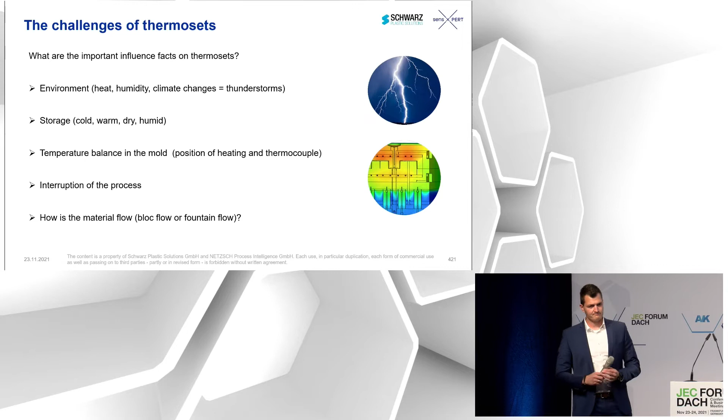Now, as the headline says, thermosets are having some challenges. And as I mentioned earlier on, it is not just the physical transformation of the material, it is the overlapping chemical situation. And thermosets as such have a specific behavior. You might compare it to nylons, for instance, on the thermoplastic side. They are fairly nervous, I would call it like that, in regards to environmental influence.

So sudden changes within your production area, like rise of humidity in case of a thunderstorm or something like that, or undefined storage conditions, today hot, tomorrow cold, and so on, have a large influence on the behavior of the material and on the processability.

Besides that, you get some typical natural things like an interruption of your process cycle. And think about the behavior of a chemical material. I would call it, it's sometimes like a wave. And if you interrupt the wave, it starts at a different height again, and you will read it in your product quality, and automatically you will have additional problems. And therefore, that leads into differences of the flow behavior, for instance. So your cavity, your body of the part will fill in a different way.

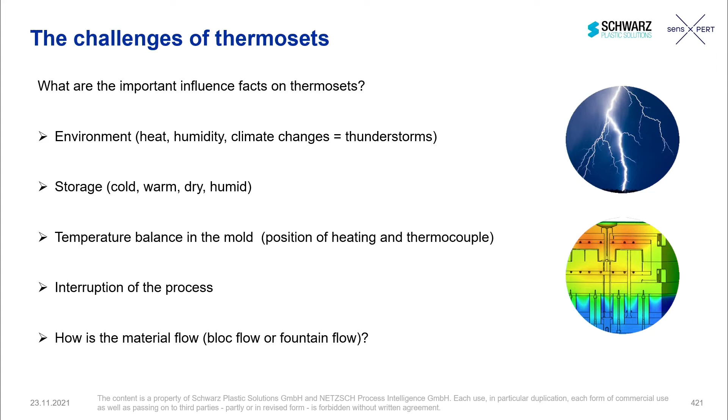Yeah, and to show you a first introduction into what can happen during a production, here we show you an example of one and the same resin system. It's a SGL E420 SnapCure epoxy resin that has been cured within different states. So one time we've cured the pure resin. On the other hand, we have cured the same resin without additional additives in a glass fiber and carbon fiber prepreg. And what you can see here is that with one and the same resin, you have 3 different behaviors of curing. So you can see that the fibers have an effect on the cure process itself.

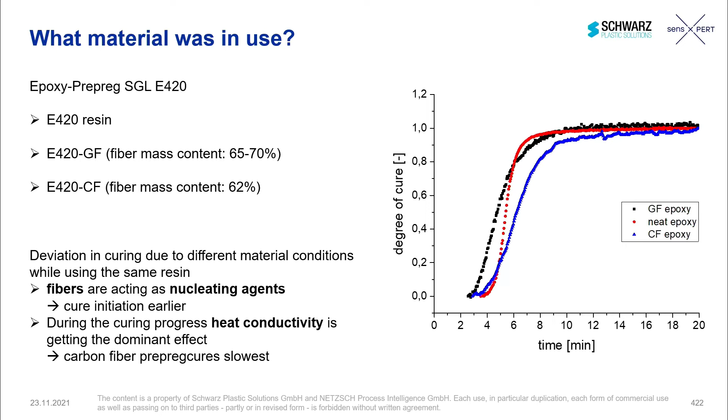So what we do mostly today is that we characterize a pure resin within the laboratory environment, and then we transform all the information into the production environment without taking into account that we have different fillers inside. And therefore, as Ingo has already said, this is one of the main reasons why today's simulations of polymer processing fail. And this is just the first introduction into how different material behaviors can be due to different fillers within a resin, but we will show you more examples later on that we created during our last session a few weeks ago, during reactive injection molding.

Yeah, in fact, as you see, both of us did trials based on epoxy resin. This is a resin where very much experience is already there in the market and where you can interpret the signals easier than if you have materials where some add-on reactions are happening during the process. This is why we started with it. In that particular case, we were using a granular material from the material maker Raschig in Ludwigshafen called Epoxidur EP 3585. That material will be used, for instance, for encapsulation or for single parts which are molded. And you can use compression molding, transfer molding, and injection molding processes.

It's a material which is pretty stiff compared to thermoplastic materials. It has a filler content of about 70%. And that's the surprising thing compared to thermoplastic materials. The filler content is much higher. Therefore, the resin or the polymer content is fairly low, and still the influence is extremely high on the behavior.

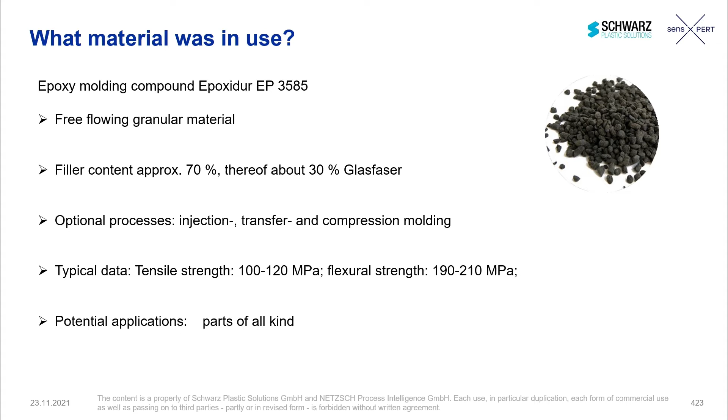The idea behind is making sure that under all production circumstances, the future generation will be able to work with those complex materials. Why is that so? The customer wants to have security. He wants to sleep well when he has placed such a product, and go into automotive or aircraft industry. Nobody wants to have a risk. You want to have something which you can rely on. Your car shall last 8 years or 10 years without a problem, and therefore the manufacturer doesn't want to see the car back in the factory or in the garage.

So therefore, they want to be safe with whatever product is designed on it, and it is an ideal material to replace metal. Therefore, it is a lightweight solution. However, you need to know how it works, and there is the problem. We are getting more and more problems in filling our shop floor with well-educated staff. So we have to see how a 24/7 production, so 24 hours a day, 7 days a week, can be filled with the adequate people.

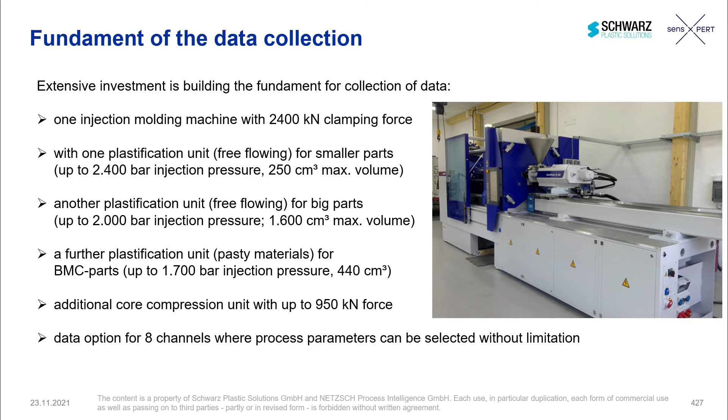And the interesting thing is, here underneath, where all the electronic stuff is installed, there are some open channels, in total 8 of them, which can be freely selected between all the parameters of that machine. And those data come out via cable. We cannot put that into Bluetooth. We still need the cable. They are then driven into a big cloud of Netzsch, where the computer scientists, I would call them, are finding their ways to select the most important data out of a real production cycle. So we are not playing somewhere in the air. We are doing real production conditions like we see with our customers, like we do out of our own experience, send it up, and then under the hood of Alex Chaloupka, it will be selected, condensed, then we verify it together, and then we prepare it for our dear customers.

And that is not enough. In addition to the machine, we also need a mold, as you can see here. And with that mold, we can do the typical scientific specimens for any kind of test bars or plates or so. But we also have some specific other inserts in that mold. All of them are equipped with a variety of sensors, temperature sensors, pressure sensors, and the dielectric sensor, which is the most important one in that case, because we are able, by the technology of Netzsch, to determine whether a process cycle is finished or not.

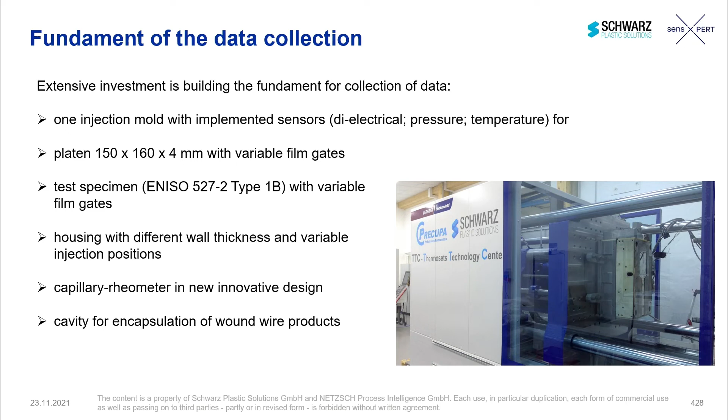Nobody likes that. On thermosetting material, you don't see that. But you will see it on the cost side, because it's much too long in the cycle, and you will also see it in the quality of your material. That is why we have all this reading and intelligent equipment installed, and that gives the stability and the quality into the cloud.

How do we do that? We have connected our package to the machine environment. We have an edge device created by ourselves where a huge software package is running, also equipped with artificial intelligence, where we collect data from sensors in the mold and collect the machine parameters.

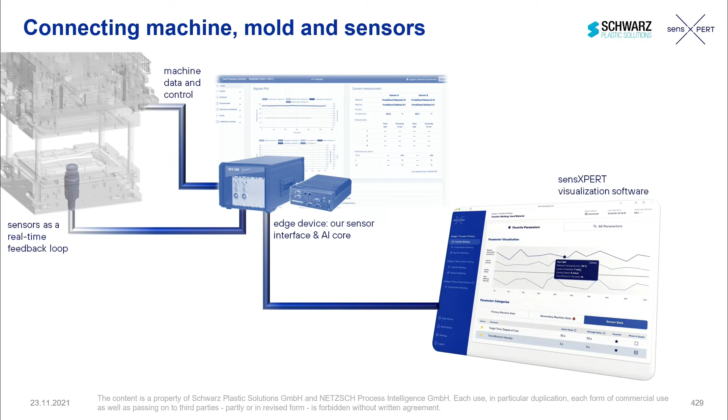At the same time, while collecting the data, our AI algorithms are running and calculating quality criteria of the material, like glass transition temperature and degree of cure. We can also follow different mixing ratios, like baking a cake with different amounts of constituents, and see the difference. Based on the information our AI model has, we can readapt the process to create a good part at the end.

After collecting the data, we transfer it to the cloud environment, which acts as the storage system but also as the global AI platform, because here we have more or less unlimited space and a huge amount of data we can store. It can then be used to readapt the machine learning models and continuously improve the model we're using.

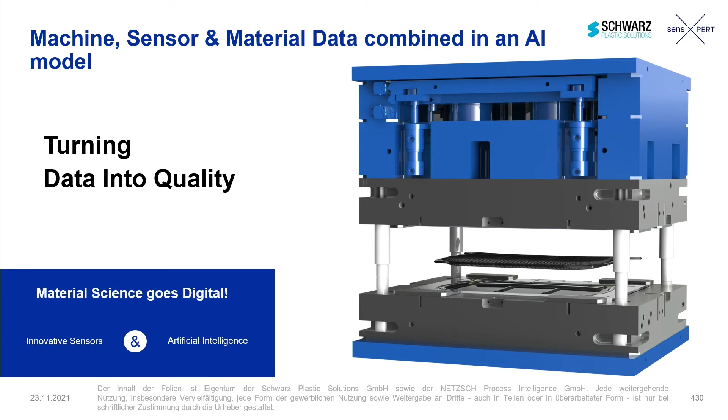What we principally do is collect data from three different sources during the production environment. We use the machine data, the cavity data - sensor data out of the mold, like our dielectric signal, to collect data on material behavior, pressure, or temperature sensors - and we also use material data, here we talk about reaction kinetics, the physics and chemistry behind the behavior of polymers.

Combining all three sources of data, we are able to see the dependencies between process parameters and material behavior, and therefore are able to readapt the process due to different states of the material.

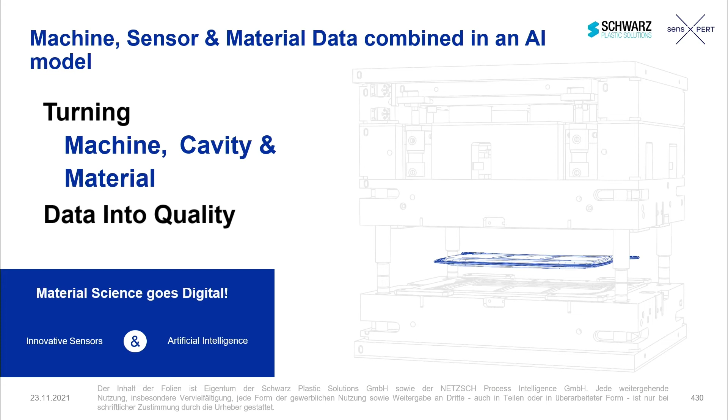When we look at artificial intelligence, what are the prerequisites? There's a high need to create a huge amount of data to be able to have the basis for the statistics AI is using. Therefore, we need a huge amount of data we will never get from a real polymer production plant.

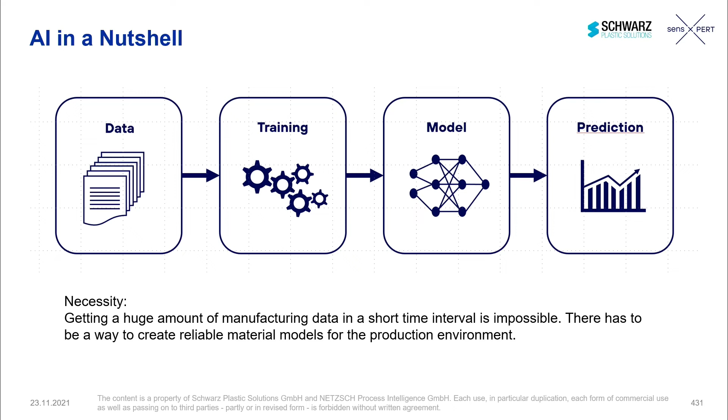There's no chance to install a package and follow the process for 6 months, 12 months, or longer to get enough data to create a machine learning model capable of readapting the process in terms of creating higher part quality or reliable processes.

Therefore, we have our own way of doing artificial intelligence. We simulate our own data sets based on reaction kinetics, real process data from the environment we're installed into, and we combine current quality criteria of our customers, whether it's degree of cure determined with a differential scanning calorimeter from the lab, or the elastic modulus created via dynamic tests.

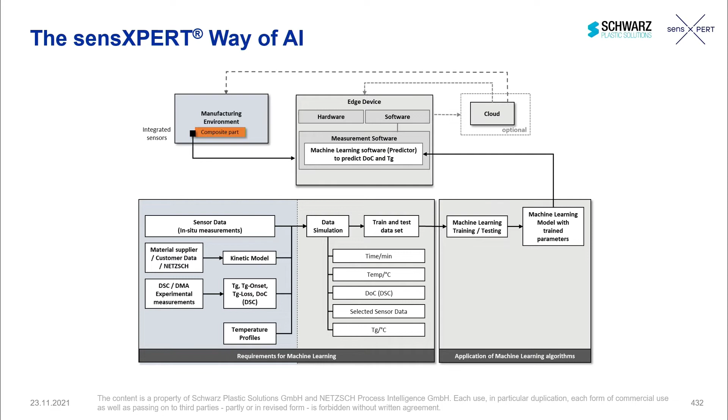Whatever our customers have as a standard today, we can use, and we can simulate the data sets we need based on the first measurements out of a real mold, combined with material science, to be able to simulate different states of the material.

Therefore, we vary temperatures in a simulation environment, and also humidity, to create a huge amount of data sets and see the dependency within different states of the environment.

We have a very long bridge to gap between the laboratory environment and the process environment, because the laboratory environment is nothing like the process environment. We have temperature deviations within the process environment that we will never see in an isolated environment during lab characterization, and we have material deviations we cannot really follow.

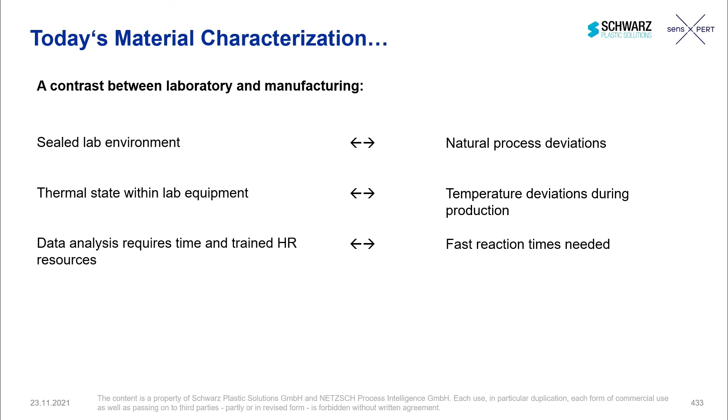So there are material deviations, batch-to-batch deviations, that occur during the manufacturing process. We have to react to them, and that is what we do.

Now what we do today - I wouldn't go so far as to say we do trial and error, but in many cases we do, because we don't know a lot about the material, especially about lot variations.

And therefore it's important, as Alex has underlined, that we do not work somewhere in heaven - we work with our feet on the ground, with real parts, with real processes, and with variations of these processes.

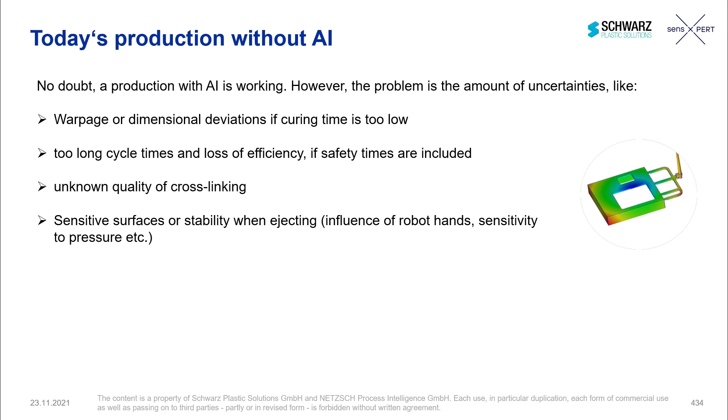We will check - you see the product here on the side - let's say a case or a box, whatever you want to call it, with different wall thicknesses, with different gate positions, because all 4 gates can either be opened or changed. So we can really do a lot of different process variations with, in that case, one complex mold.

And therefore we can find out what happens in real life when cycle times are too short, when injection speed is too high - that means too much shear and too much heat comes into the reaction process, and you get a sudden cross-linking, which you would usually like to avoid.

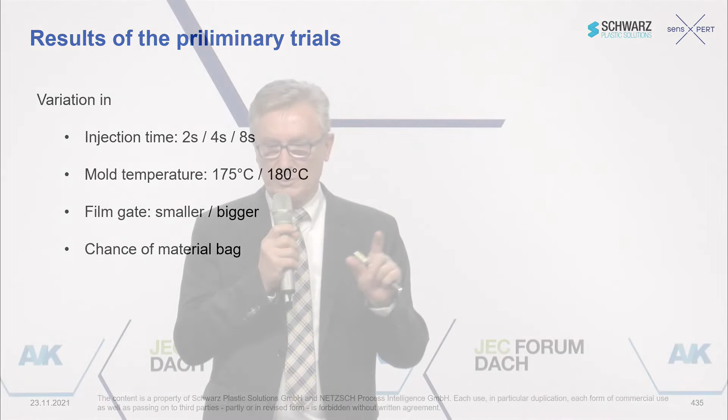So in that first trial, we varied the injection time, equal to injection speed, by standard time, which would be 4 seconds in that sample. We doubled it, and we did 50% of it - very strange extremes. We also varied the mold temperature only a little bit to see: do the 5 degrees have an influence, or are we overdoing the whole thing?

Interesting, we can also vary our film gate. That means we have a thicker entry of the material, so it basically flows in like chewing gum. Or we have a very thin gate where it's heated up so fast that the material almost comes in like water.

And finally, we did the same material, but we took different bags, because out of experience, we know that even one bag to a second bag might have a big influence on the processability. And that is what we want to show you now with the next four slides, with the deviations we've performed to see the difference between pure reaction kinetics on the left side and the real material behavior we've measured within the mold.

So you can see that varying the injection times, in theory, there should be a shear change and therefore a different temperature state within the material that enhances the cure speed or lowers it. And that is what we can really measure, you can see here on the right side. But with pure reaction kinetics, like simulations are done today, or lab characterization, and then transforming the data with pure reaction kinetics to a process environment fails in this case, because here we cannot see the difference that really occurs.

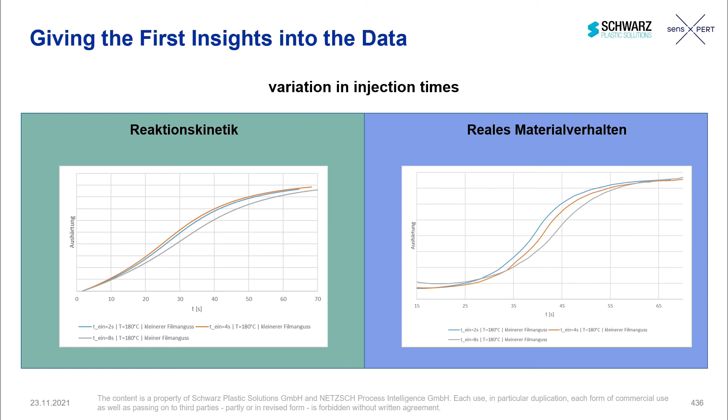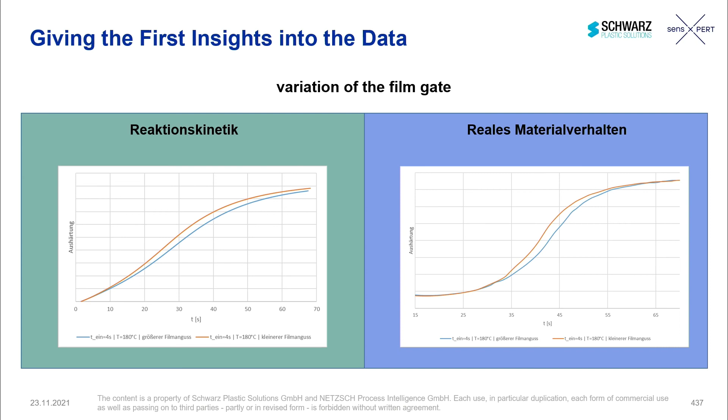On the other side, when varying the film gate, here we also have a different behavior of shearing and temperature influence. And also here we can see, in this case, reaction kinetics and real material behavior fit quite well together. But when we change the material bag, on the left side you can see pure reaction kinetics, just based on the temperature measurement within the material, cannot see the bag-to-bag deviation. But we can see it during the manufacturing on the right side.

So here we really have the chance to make a change within the process environment and to teach our artificial intelligence how to react on that and how to readapt the process.

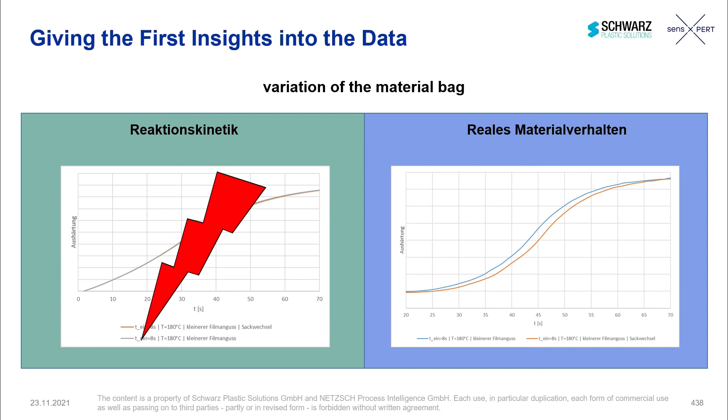On the same side, we can see... I'm sorry that I'm interrupting you, we are very close to the end, because if we want to do Q&A, we have to, otherwise, because we have to close around 6. That's the last example, so fine, we are very, very close to the end.

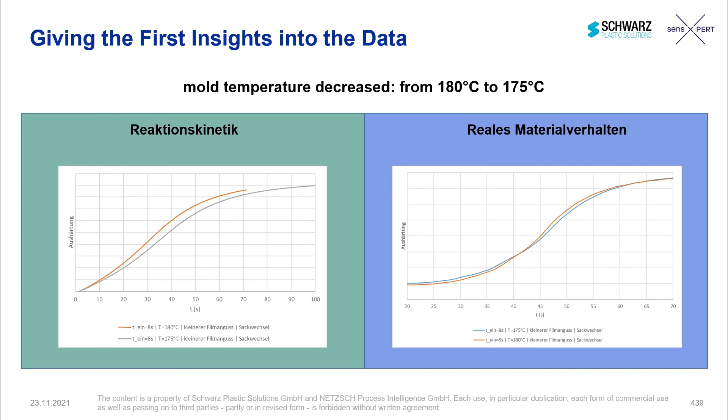Here, a change of just 5 degrees C in reaction kinetics should make a big change, but we can see in the real material behavior it doesn't. So we have a slight change, but not as dramatic as we've expected based on pure reaction kinetic simulations with the basis of laboratory data.

So therefore, we will enhance our activities in the future to create more information, to get more specific about which parameters from the machine have a really big influence on the material behavior, and to further train the artificial intelligence and feed it with a database of different materials to give our customers the chance to have a reliable process without the knowledge of experts in the field of thermosets. So thank you very much.

Thank you, and Alexander, now we are open to your questions. First of all, I have to say it was an excellent presentation. I mean, every presentation was good and excellent, but this was really outstanding. No, I have to tell you, because it was so clear, even for somebody who is not really familiar with artificial intelligence, it was really very, very nicely explained.

I want to ask you a quick question, because are you offering prototyping and testing for the experts, for the industry, for customers? I guess so. That's a question for you, Ingo.

To be precise, I'm sometimes struggling with the name prototyping. Yes, we do trials for customers, very intensive trials even, so we can even use existing molds from the customer. And provided it's acceptable, we can then even put the sensors inside, and by that we can support everything. But it is not the typical prototype like you do with a printer, making one example only. That does not really work in series production. So we focus on series production, and we want to make your life more stable.